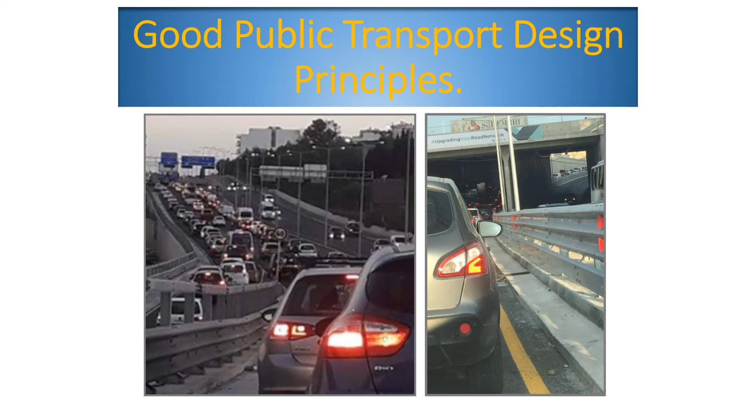Good public transport design principles.

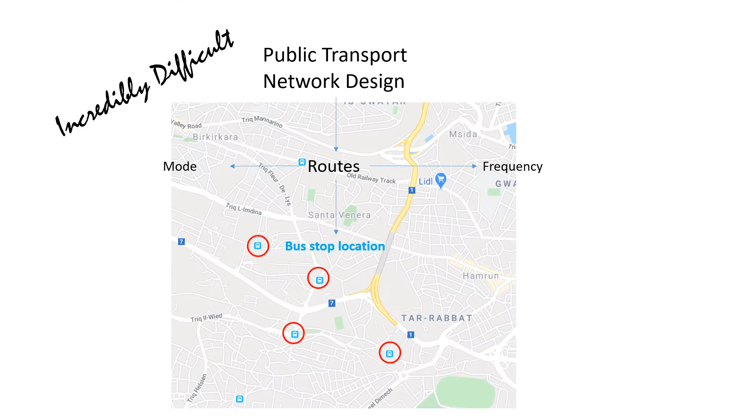Designing a public transport network is an incredibly difficult task. A planner must not only decide where to lay down the routes themselves, but also their mode, frequency, bus stop location, and bus bay design, among others.

Furthermore, best practice guides on practical network planning are few and far between. The academic community has had more interest in the engineering and economical aspects of public transport networks than its planning aspects. Despite this, operations research is a venue that is making advances in public network design and has proven its worth in timetabling, as experienced for example in Zurich's public transport system.

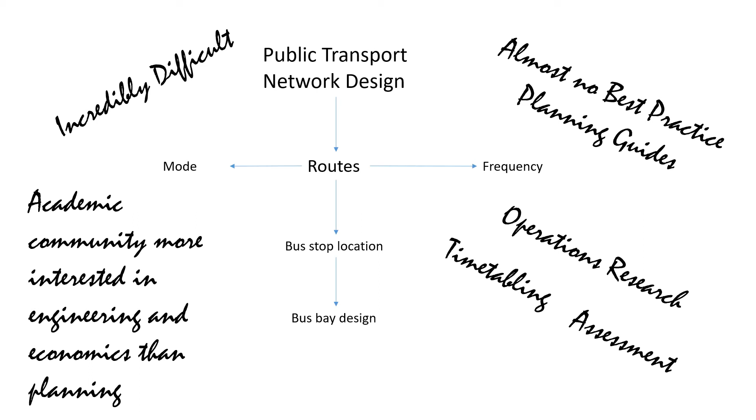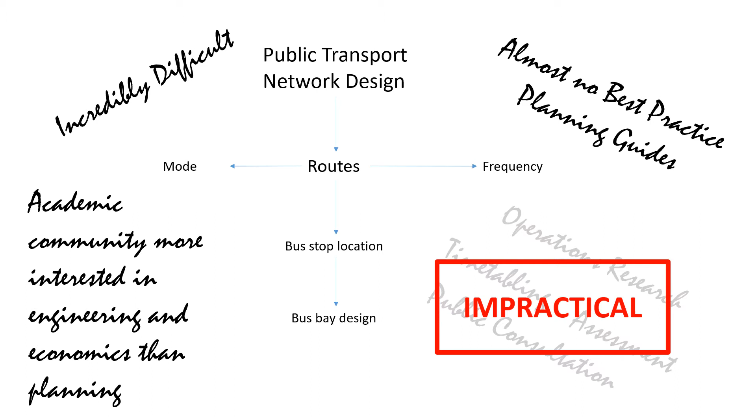Public transport design is divided into three hierarchical levels: strategic, tactical, and operational. At the strategic level, the policy of the transport network is set, from which the general network design takes shape. At this stage, the politician has to decide what the aim of public transportation is.

Is it merely a basic social commitment for those that are not able to drive, and therefore its mere existence is sufficient? Or is it a means to alleviate congestion, and therefore requiring a much greater effort to plan and invest in?

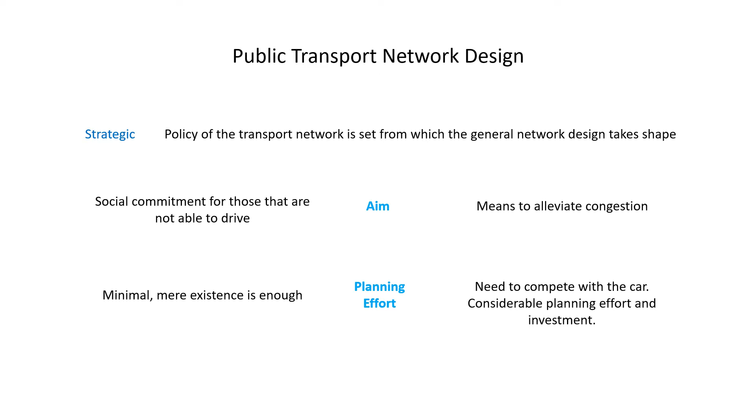At the tactical level, the frequency and the modes of the different lines are set. Finally, the rosters and schedules of the personnel and vehicles are set at the operational level.

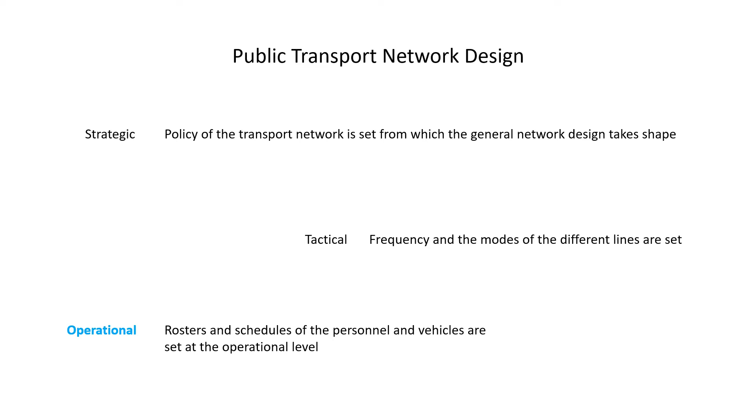Public transport design is a continuous and circular process. Once a design level is completed, that does not mean that it is immutable. On the contrary, even after implementation, feedback from the ground should affect all levels of design, and these should then be amended accordingly.

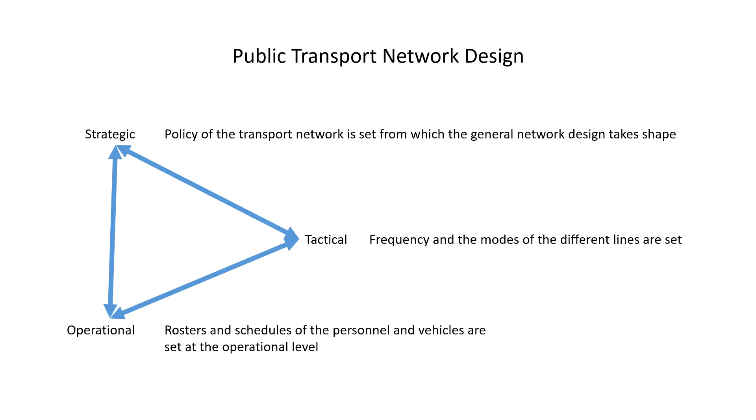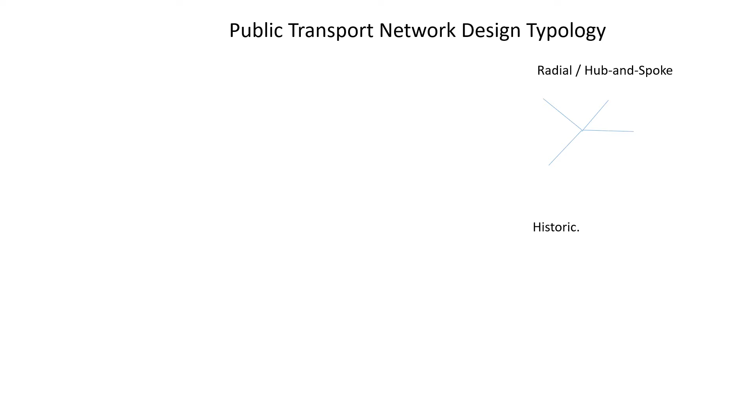Public transport networks are historically laid out in a radial fashion. Radial networks, also known as hub-and-spoke networks, emerge out from the urban centers into the hinterland, like the spokes of a wheel. By catering mostly to the trips from the hinterland to the core, the radial approach manifests a design that requires destinations, other than the CBD, to have highly indirect travel.

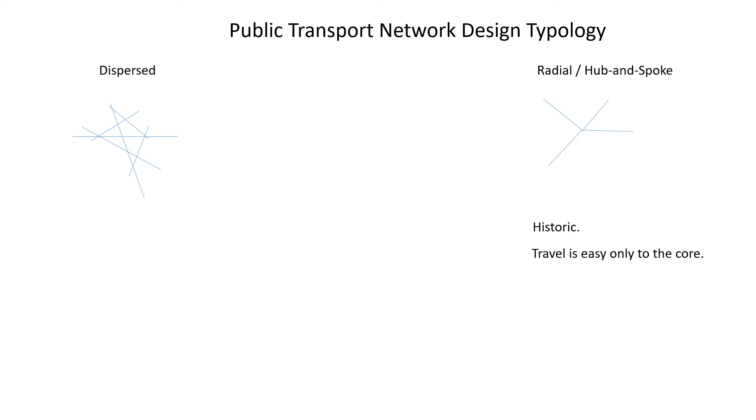Radial networks are thus desirable only for trips to the core. A second network typology is the dispersed or multidirectional network, in which no discernible pattern exists and the go-anywhere-to-anywhere approach is taken. The aim of this kind of network is to achieve seamless travel between the different lines, a state called the network effect. The network effect is achieved by conceptualizing lines not in isolation but as part of a network in which transfers, although undesirable by travelers, are indispensable.

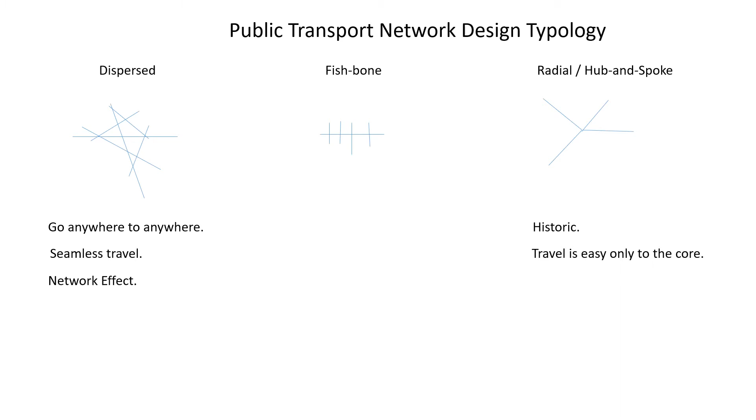Finally, the fishbone kind of network is something in between the radial and the dispersed network design. It consists of a main trunk through the CBD, from which perpendicular lines emerge throughout its length. An example for such a network is Curitiba in Brazil. Curitiba was designed with public transport in mind and laid out around the main trunk.

Although there is no readily available objective statistic by which one can identify whether a public transport network is a radial or dispersed design, the dispersed approach is deemed to be more effective, about as efficient, and more socially equitable than the radial approaches. Finally, having vehicles converging to a point makes radial networks become more susceptible to bus bunching.

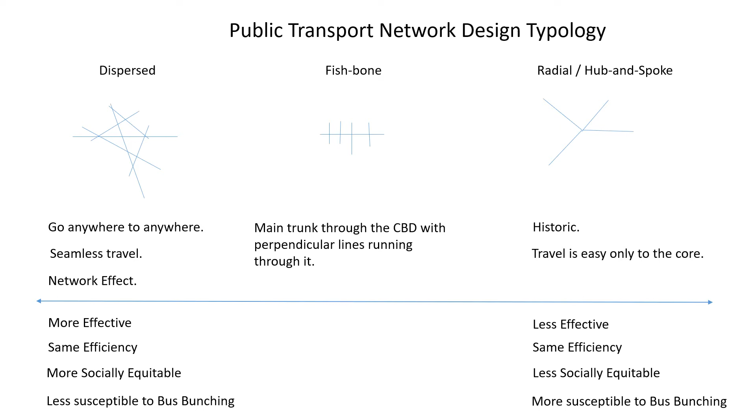The country that has come closest to the state of the network effect is Switzerland. The small town of Schaffhausen, for example, surpasses even central Brisbane in the sheer number of journeys by public transport per head by about 4 times.

In Zurich, one of the wealthiest cities in the world, public transport does not only have a sizable mode share, but has the admirable fact of being one of the few public transport systems in the world that not only has an ever-increasing modal share, but also enjoys patronage from the wealthier sections of society as well. This enviable result is achieved without imposing moral guilt on the population for not using public transport. Hence, Zurich can be regarded as the model city.

Although topography may have played a part in Zurich's success, it was achieved mostly by good planning, specifically restrictions on parking, limited supply of road space, prioritization of public transport vehicles, increased pedestrian areas, good land use density, and urban structure. The result is a public transport system that, although comparable with other cities in terms of speed, is not hampered by traffic, and thus is able to serve more stops in the same time period as its contemporaries.

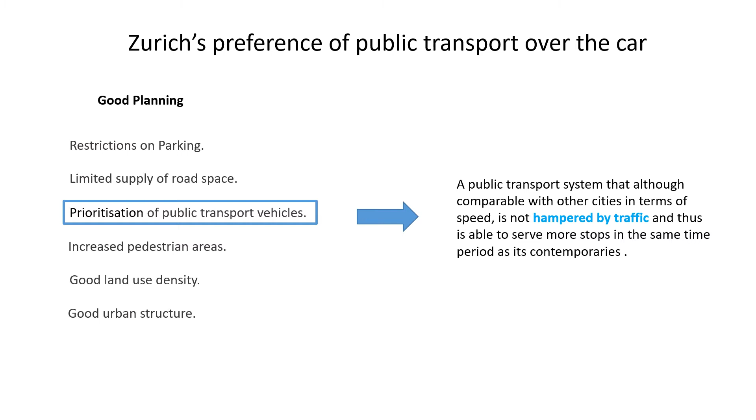Public transport networks can be designed in four stages. In the first stage, the flows of movement of people are understood: where trips start from, where they end, and how these flows change over the course of the day, the week, and the season. The information gained from the first stage would then help the planner build the network in the second stage.

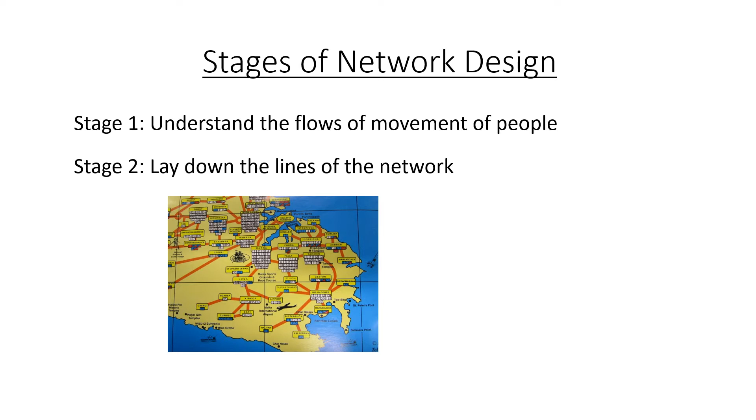In this stage, the lines of the network are laid, and the general idea of the network takes shape. The third stage would entail the transformation of the lines into routes on the ground. In the fourth stage, the mode of each route is selected, and the timetable is set.

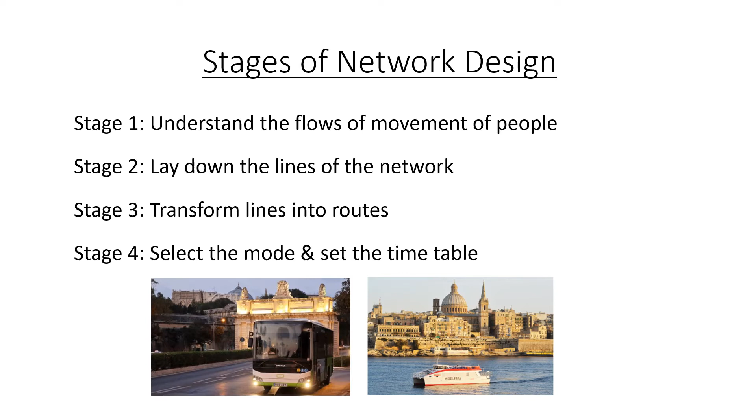Although different definitions for line and route exist in the literature, in this video they are taken to mean as understood by Nielsen et al., as follows: a line is defined as the operational element of public transport, whereas a route is defined as the physical location through which a vehicle passes. The lessons learned from Zurich, among other cities, has enabled Nielsen et al.

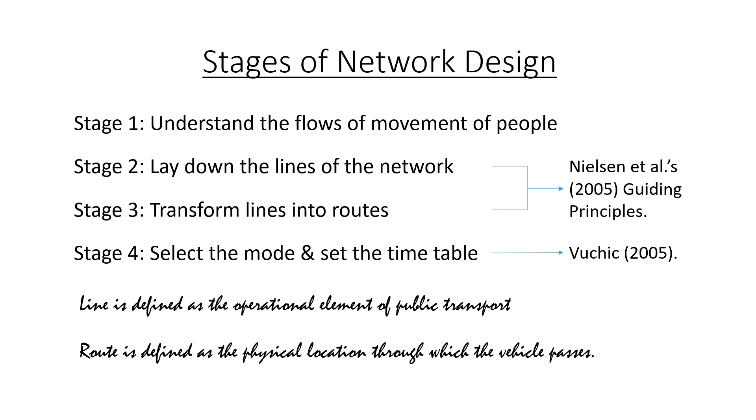to develop a set of guiding principles to help the public transport planner lay down the routes. After a route network is designed and laid down, its frequency and capacity requirements can then be calculated more precisely using Vuchic's guidance. Nielsen et al.'s first principle is travel time.

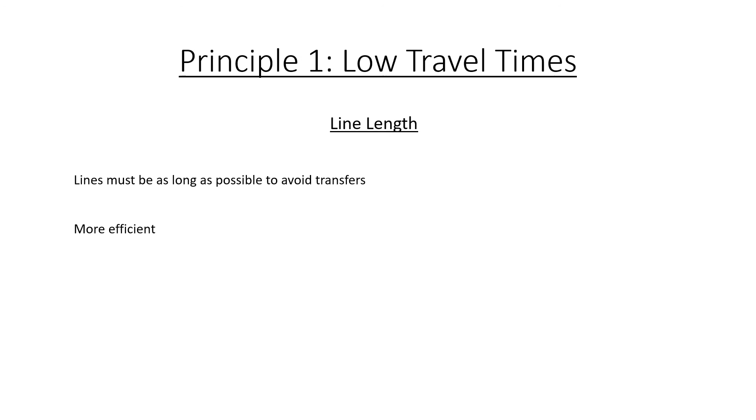Travel time is a major consideration when people decide whether to use public transport or not. Therefore, every effort must be made to decrease it. To decrease travel time, lines must be as long as possible to avoid transfers. Longer lines also have the added advantage of being more efficient because they reduce the total vehicle and driver turnaround times at the end of the lines, lessen the number of lines to administer, and lessen the number of lines to inform the public about.

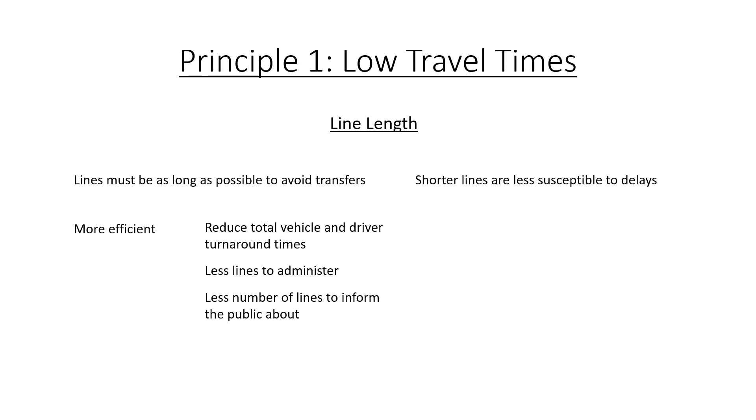On the other hand, shorter lines are less susceptible to delays. Finally, lines should be sensitive to market demand, and therefore when demand changes in a particular segment of the lines, wherever practical, the vehicle must also be changed.

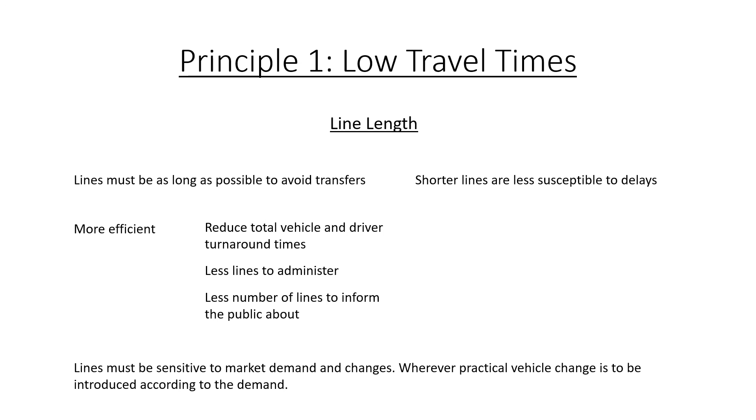The total journey time by public transport that a traveler takes is affected by walking to the bus stop (access time), the number of bus stops on a line until egressing from the vehicle, walking from the bus stop (egress time), and the total journey length.

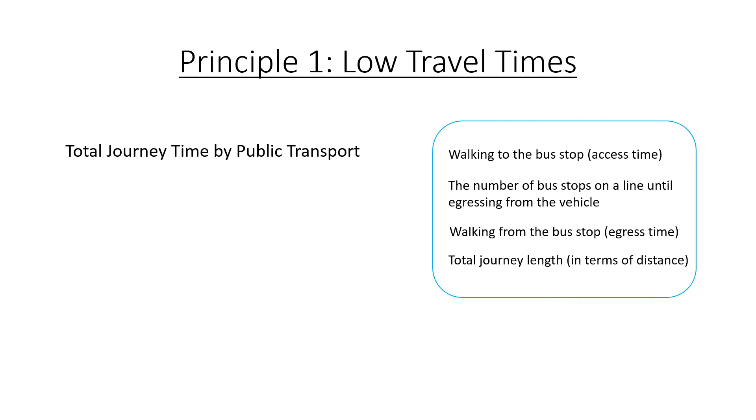Conversely, the speed of travel of the public transport vehicle itself depends on the distance between stops, the maximum speed of operation on the lines, the rate of acceleration, and the rate of deceleration at the stops.

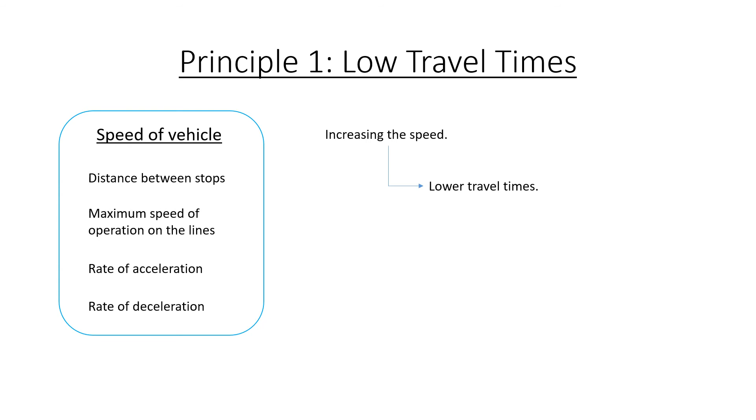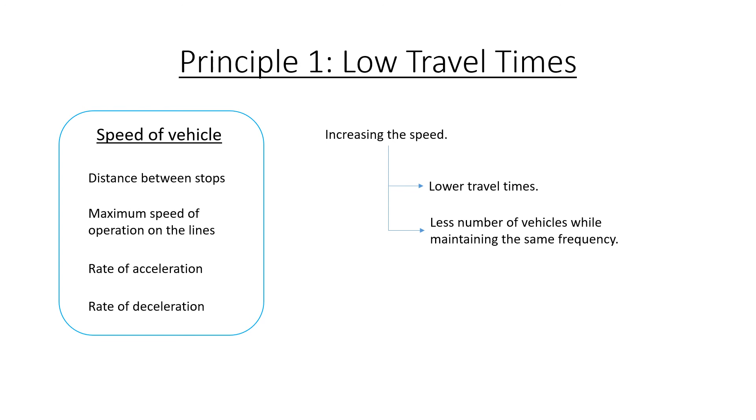Increasing the operational speed not only reduces the travel time, but also has an added advantage of lowering the number of vehicles required to perform at the same frequency, thereby reducing costs. In order for operations to be sped up, it is imperative that public transport vehicles have priority treatment,

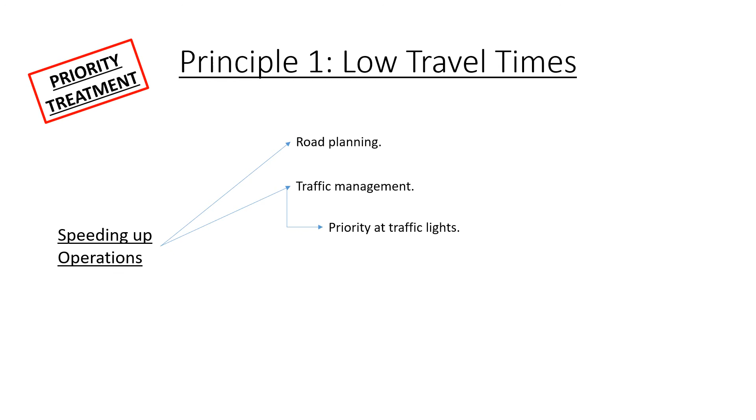not only in road planning, but also in traffic management measures, such as priority systems at traffic lights, control of priority lanes and signals. Operational speed is also affected by ticketing systems, location and distance between stops, stop design, and vehicle design.

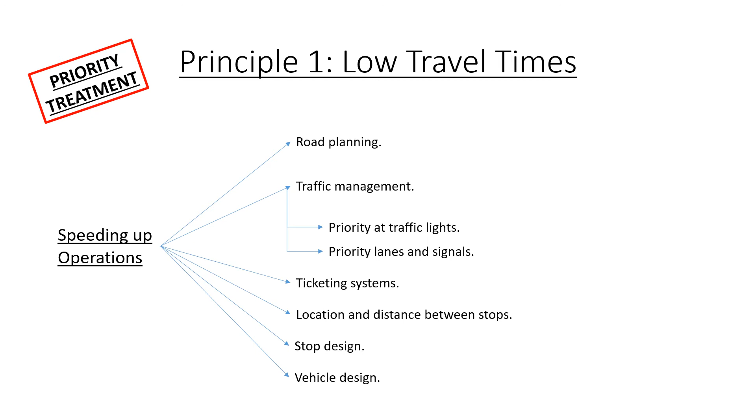Although infrastructure may need to be adapted to cater for public transport, there is usually no need for very expensive infrastructures, such as underground systems.

The second design principle is a simple and stable design. A public transport network is best designed to remain stable over time, so that it may influence land use development around it. It must not be tailor-made to specific markets, but ready to use from anywhere to anywhere. The design must also be flexible enough to be able to adapt to the demand.

For the system to be as efficient as possible, and thus more competitive, travelers need to be directed onto the main corridors by making use of transfers. The need for efficiency, therefore, conflicts with the need to provide public transport access everywhere as a social commitment, and the need to reduce excess walking time.

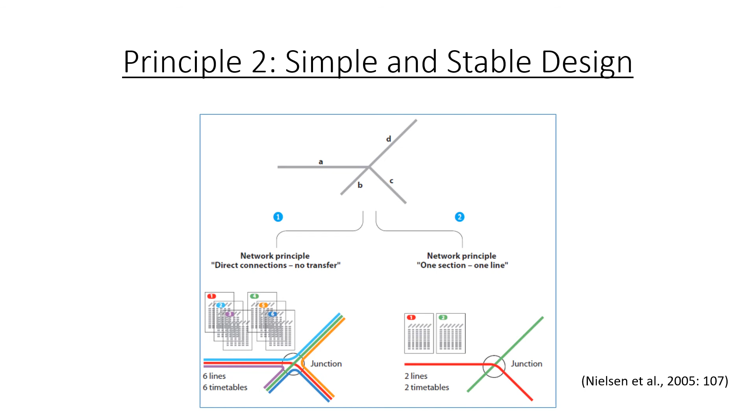Transfers are a disincentive for travelers, especially because they have to wait, though in practice a complicated system with direct lines requires much more planning effort and time. Hence, a public transport system that manages to reduce the discomfort of transfers whilst making use of them is more desirable. A public transport network should be conceived like a road network, with some parts capable of handling high demand at high speed, and others acting as feeders to the main arteries.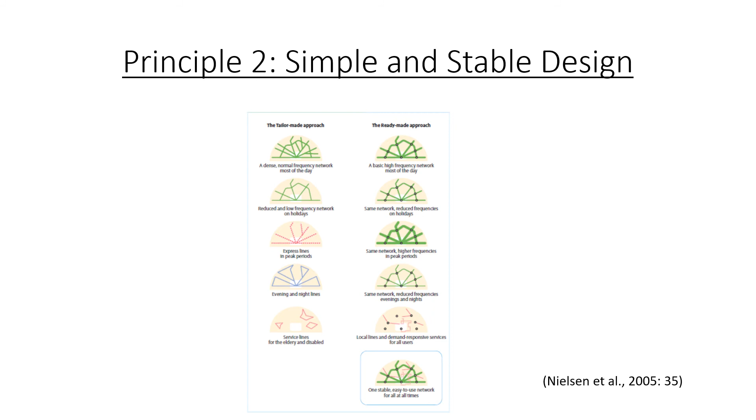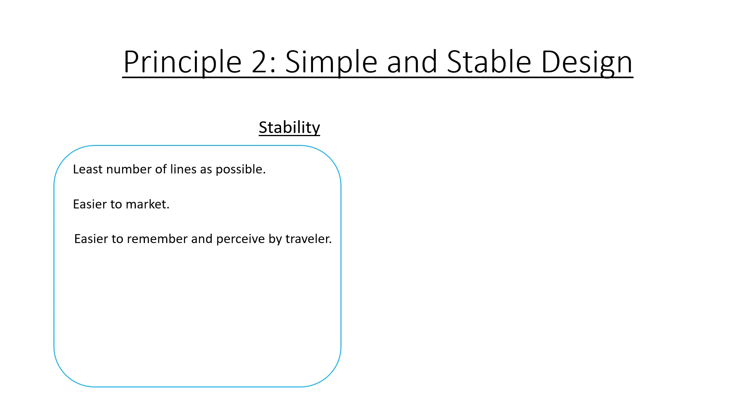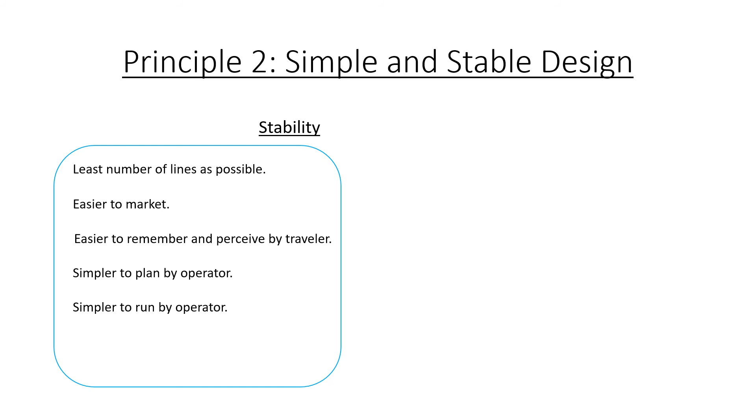Stability in the design is achieved when it contains the least number of lines as possible. Having as small a number of lines as possible is also desirable because it makes the services easier to market, remember, and perceive by travelers, while also simpler to plan and operate by the provider. A stable system reduces the risk of bus bunching or convoying, that is, buses servicing the same line arriving at a bus stop at the same time.

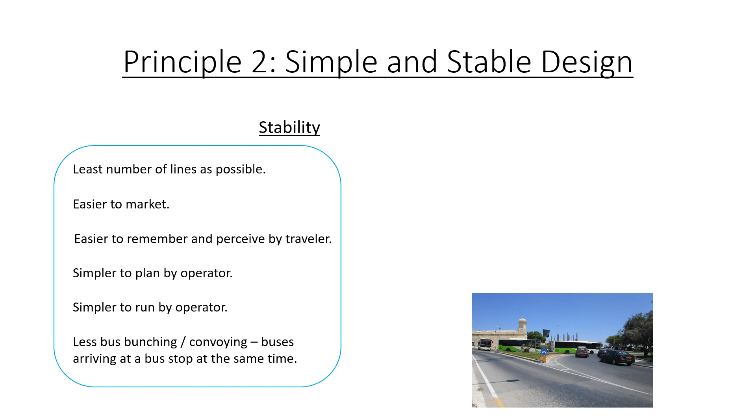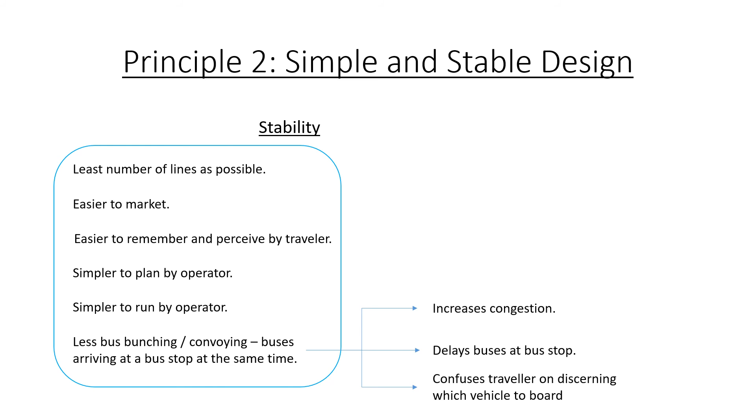Bus bunching increases the risk of congestion, delays buses at the bus stops, and confuses the traveler on discerning which vehicle he has to board at a bus stop. Stability, therefore, requires the important principle of one section, one line, which demands that, as much as possible, an area is served by only one line.

Flexibility and wide reach are then achieved by the provision of supplementary lines to the main trunk. These supplementary lines may not only consist of scheduled public transport services, but also other modes, such as taxis, demand-responsive services, and bicycles.

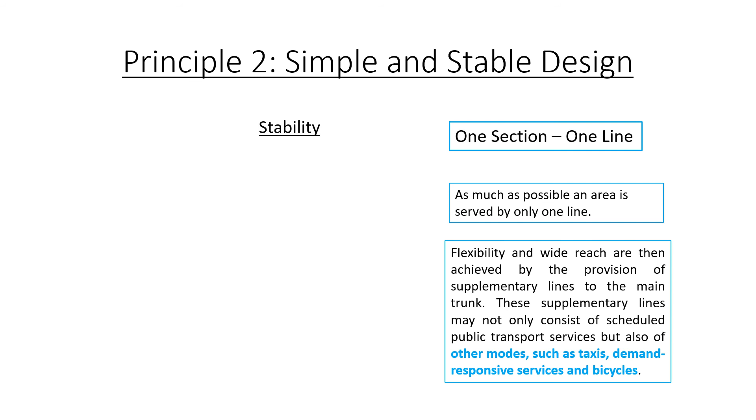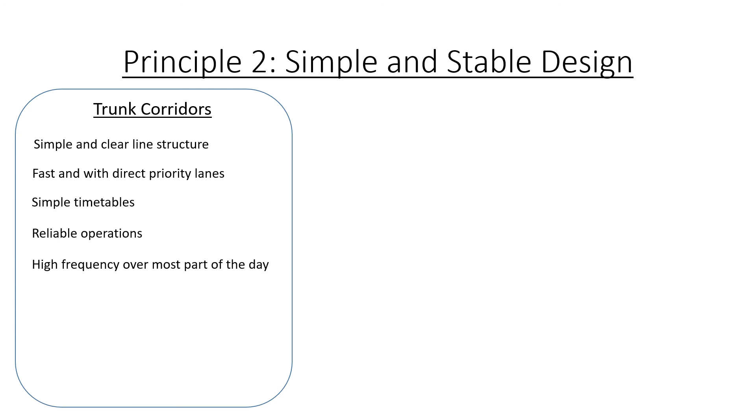Trunk corridors need to be simple and with a clear line structure, fast and with direct priority lanes. They need to have simple timetables, reliable operations, high-frequency services over most part of the day, and real-time information on bus stops and vehicles. Finally, trunk corridors need to be high-profile through the design of stops, vehicles, signs, and simple network maps.

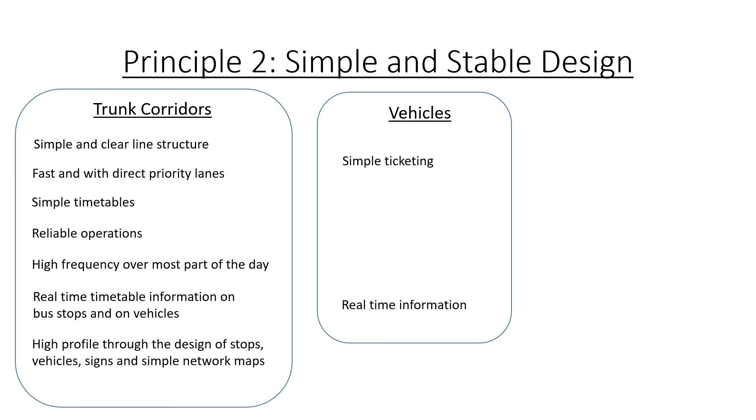In order to increase comfort and reduce stopping time, vehicles need to have simple ticketing systems. Furthermore, vehicles operating on these lines need to not only have real-time information, but also a high level of comfort, ample capacity, and be low-floored.

Finally, the interchanges at the trunk lines need to be both efficient and have a pleasant environment with low levels of air and noise pollution.

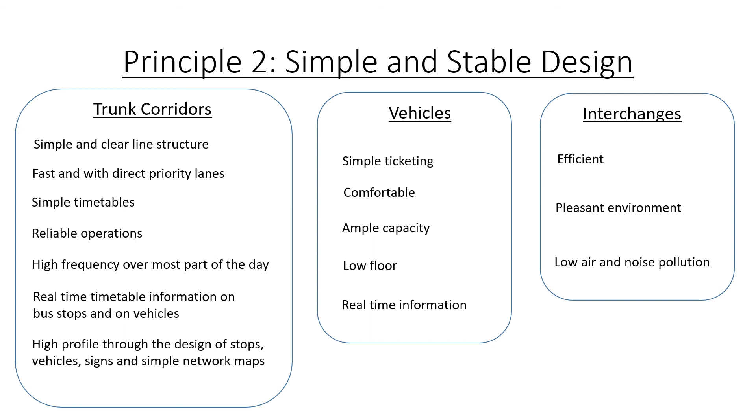Finally, the route alignment can make the difference between the failure and success of a system. Lines must preferably go through the service areas in a direct fashion, with no meandering. They should follow the natural direction of travel in the serviced area, thereby improving the chance of travel without transfer and avoiding servicing the same catchment areas.

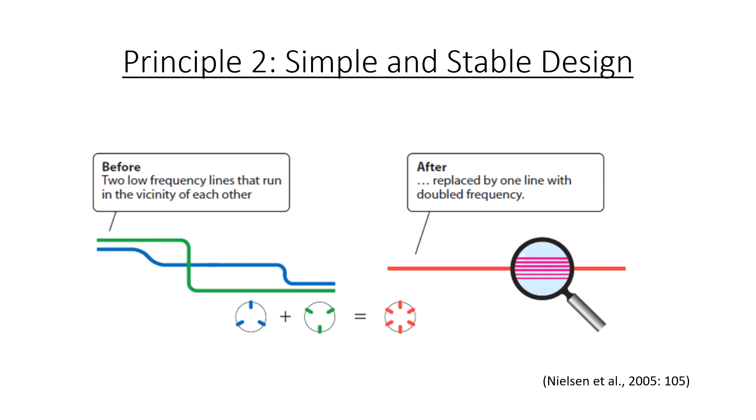The third principle is frequency. Frequency is determined by market analysis and optimized by experience of the daily running of the system. A robust network design implies that the same line would have different frequencies during the day as the daily demand changes. Public transport providers are always under pressure to provide higher frequencies, even though increasing the frequency does not gather a proportional amount of profits.

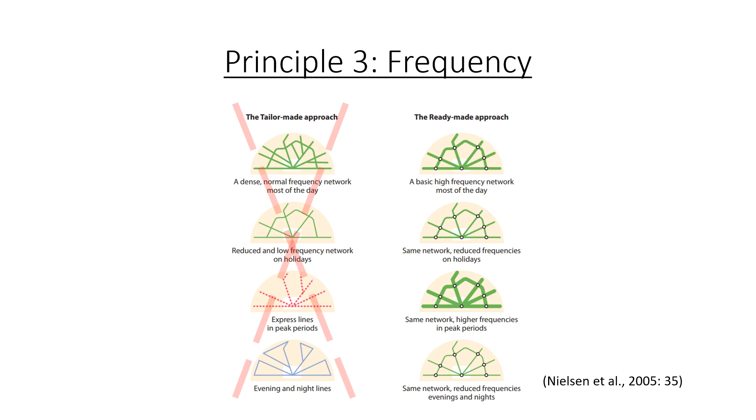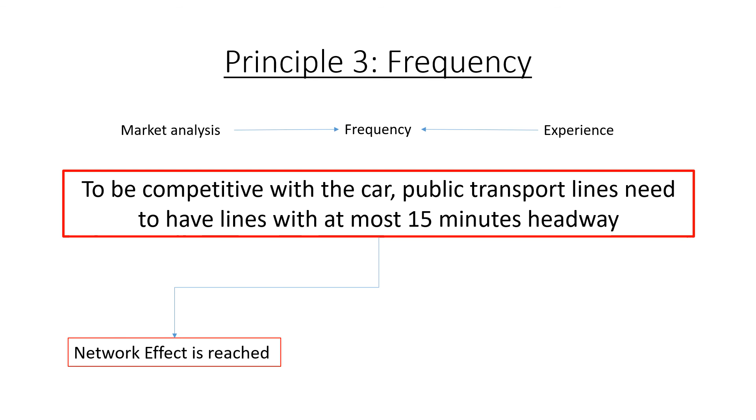What frequency is acceptable differs between different locations depending on what the public has been used to. To be competitive with the car, public transport lines need to have headways of at most 15 minutes. When all lines are high in frequency, the network effect is reached. This level of frequency is, however, not economically viable in low-density areas. For rural areas to be in a state of network effect, therefore, timetable coordination is crucial.